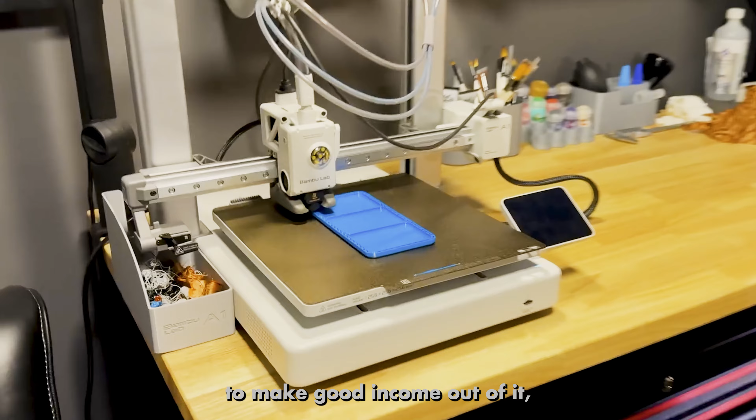Over the years of running my 3D printing company, I see the same mistake time and time again. People with a 3D printer are struggling to make good income out of it. Not because they are bad at 3D printing, and not because there is no money in 3D printing, but because they make some major mistakes. One of them is selling the wrong thing to the wrong audience.

That's why I will show you in this video how I make 3D printed LED signs step by step, the whole process. Let's get into it. See you in my office.

So we are here in Canva. When you want to make a 3D printed LED sign, at the beginning you need to make a logo, or the company will give you a logo. In case you make the logo yourself, you can start in Canva. I just made this simple text Anej Prints, and then we can move with this logo into Fusion 360.

But you need the file as SVG. You can export this file here. I think you need paid Canva for this file, but there are tricks we also teach our students that you can get away without paid Canva, because you can convert these files a different way to SVG. That's one way to do it right here.

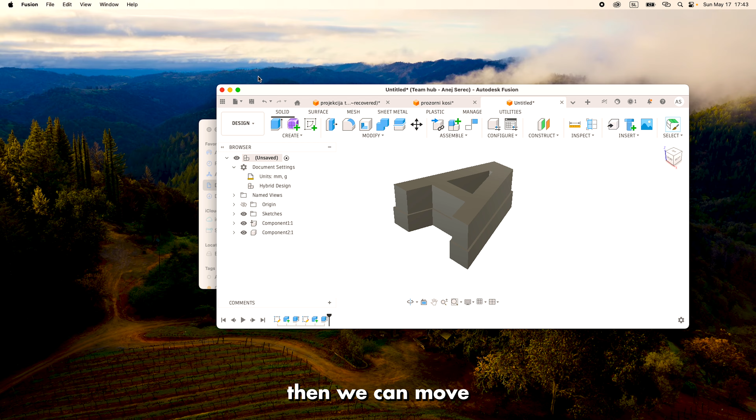That's it. So when you have the file, then we can move into Fusion 360. What I did here is I imported this logo. But before you import the logo into Fusion 360, you need to know how big a sign you will make, okay?

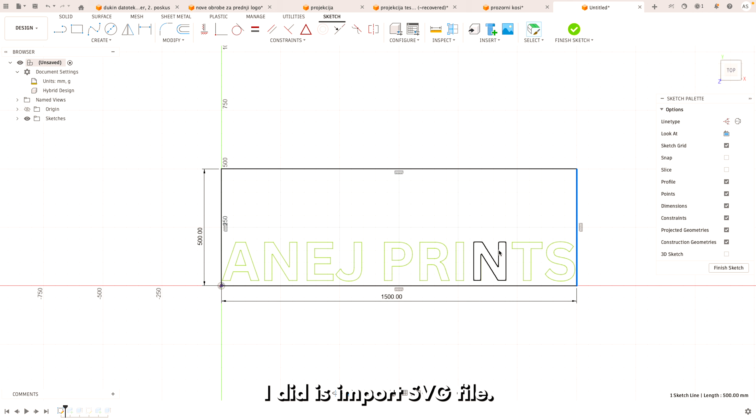So let's say I have the measurements here, 150 centimeters by 50 centimeters. This square was the first thing I did in Fusion. Then the second thing I did is import the SVG file Anej Prints and make it as big as the rectangle that I made before, okay?

Finish sketch. The next thing is I extruded the letter. You need to extrude one by one, and always when you extrude, you need to make a new component. It's not written here because we already extruded it, but you will see the new component here.

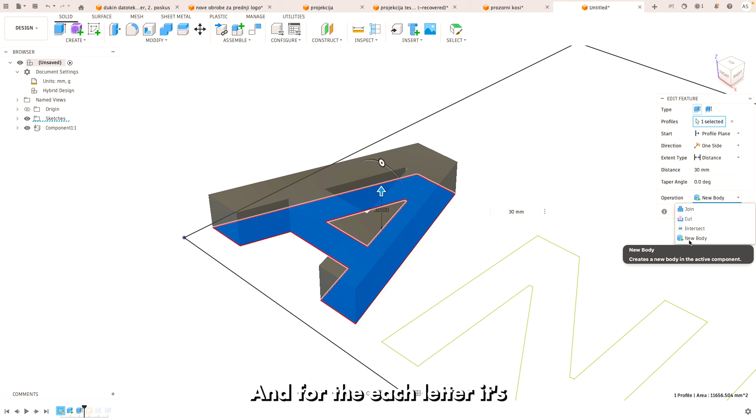For each letter, it's best to make a new component. You can also make new bodies, but making a new component is better. What we have here is the black part of the letter, and you don't need to make the hollow part.

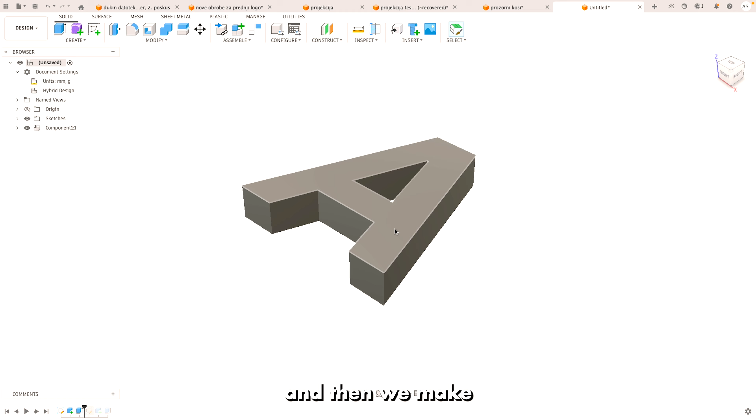You don't need to make the letter hollow, because I'm using a very good trick which saves us a lot of time in Fusion 360 3D modeling. We make solid parts here and then we make hollow letters in the slicer. So that's the black letter, let's say.

Then you need to make an offset. In this case, the offset is 2.5 millimeters. We teach our students which offsets to use, and it really depends on whether the sign is an indoor LED sign or outdoor LED sign, whether the letters are made in one piece or more pieces, and which material you're using—ASA, PETG, or PLA, okay?

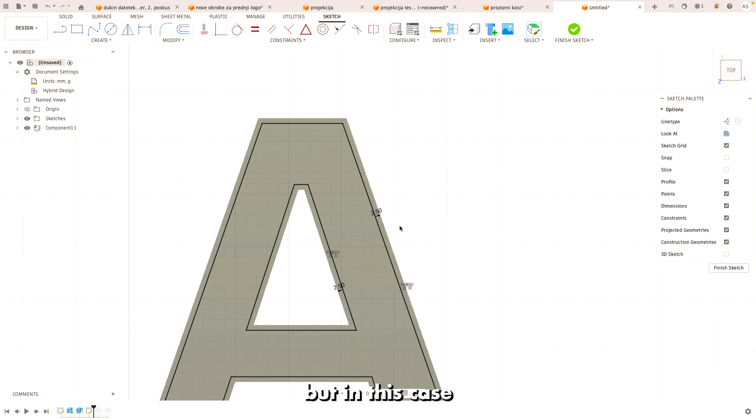So there are a lot of things you need to be careful with, but in this case we are making, let's say, an LED sign from PLA or ASA, so we can use this offset right here, 2.5.

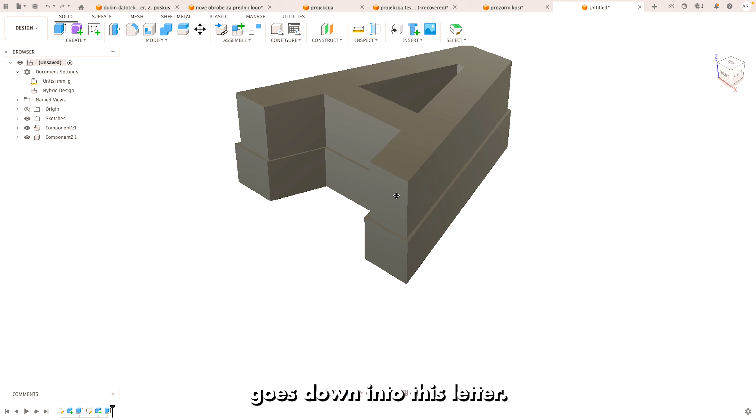Then I extruded this letter on top of another one, and this bigger part will be a transparent letter in the future, because you can see it can fit into this one like this, okay? And it's also higher. Why? Because this letter goes down into this letter, and then you need some space which will glow, because this will be the transparent part and the bottom part will be the black part, or any other color.

So then we export those two things one by one as STL files, and then here we are in the Bambu Lab slicer. When you import the letter, for example the black letter here, you always need to turn it 180 degrees.

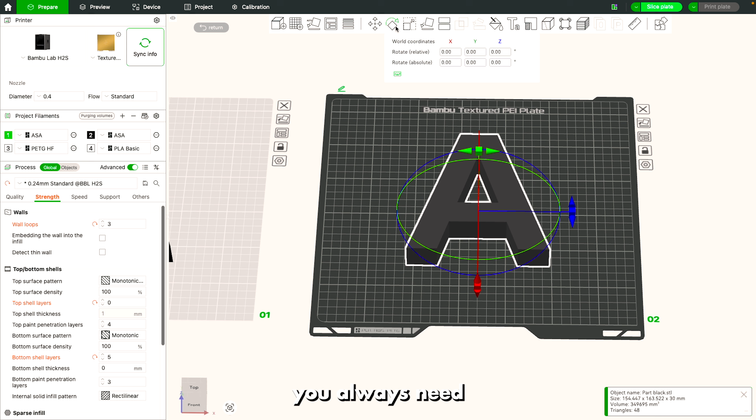Never forget this. Why? Because this side is actually the bottom side of the letter, and this side is actually the top side of the letter when it will be printed, because you want the top side to be on the bottom on the board, so it will have a nice finish, okay?

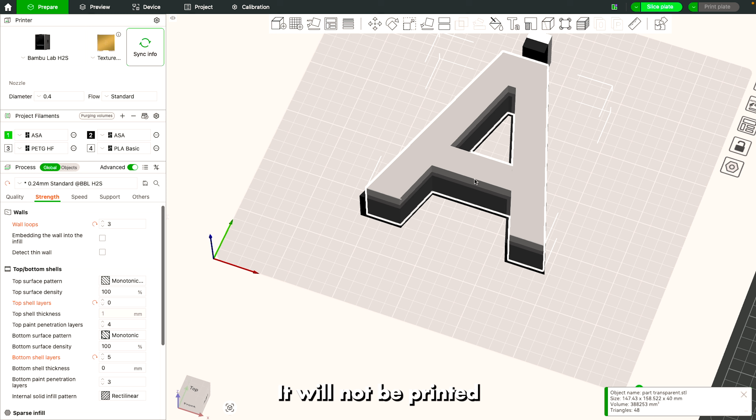And you don't need to turn around the transparent part. So we have the two letters here together. It will not be printed like this, of course. Both letters, transparent and black parts, will be printed separately on separate print beds, because it saves time so you don't need to change the filament every single layer.

If you would print them together, then you would need to do this. Okay, here's the trick. Everything stays the same here for this kind of LED sign.

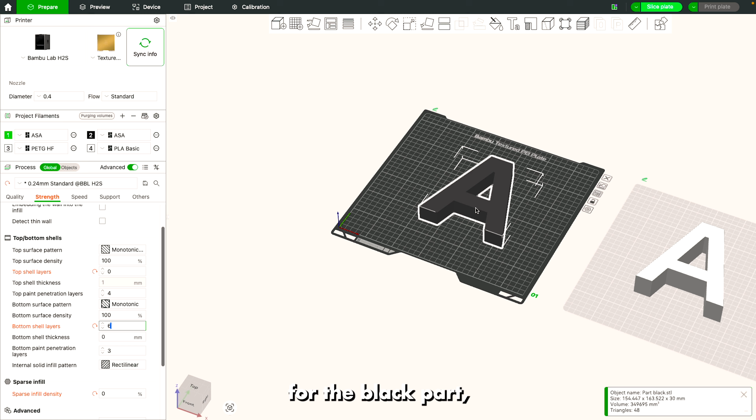Then the wall loops: you need 4 wall loops, 0 top layers, and let's say 6 bottom layers for the black part, and 0 infill. What we have then is a part like this when it's 3D printed. We have 4 walls and 6 bottom layers.

We saved a lot of time right now, you can already see, because we didn't need to model the hollow part in Fusion 360. We can just export a lot of letters as full bodies into the slicer, and when we slice each letter we already have the settings, and the letters will come out hollow.

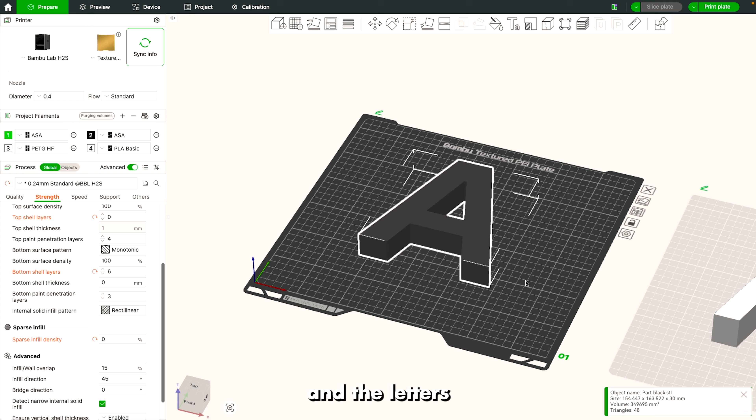For the transparent PETG letter, we can change the settings a little bit for inside LED signs. We can have just 3 walls and 5 bottom layers, and then it will look like this, and those 2 parts will come together nicely.

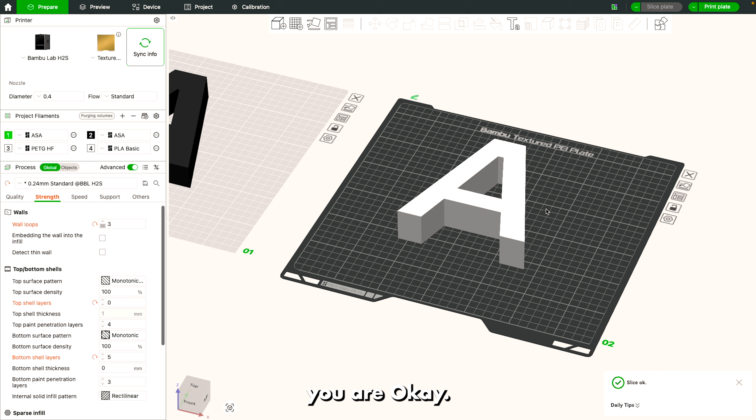You need to be careful about the fittings. The fittings are really important here, and they depend on whether you're making an inside or outside LED sign, and which material you're using. For inside LED signs, it's okay if it doesn't fit perfectly because it doesn't need to be watertight. But for outside LED signs, it's important that it's watertight so we can seal everything nicely with a sealant at the end. We can move to the workshop.

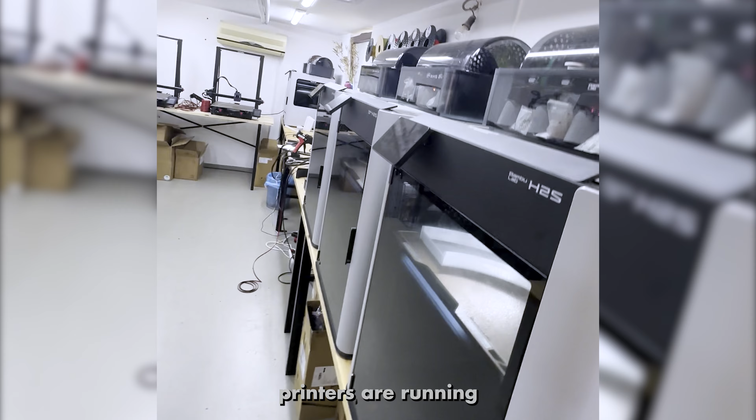So we are here in the workshop. Printers are running, and I want to show you how everything looks when it's 3D printed. Now I'm printing the transparent parts on our Bambu Labs. This is what we made in the slicer, this is what I was talking about.

So this is the black part, very nice surface. I always use PEI beds, and this is the transparent part, and they fit together very nicely. This is just a sample letter, otherwise we make bigger LED signs. I just made this to show you how it fits together.

When you have the black parts, like this letter which was made into 2 parts, you can put the LED light into it. We are using special LEDs called the S-type, and it can be bent very easily, and then you can just glue one cable onto it.

We still need to connect this one, and then the transparent part will come into this letter E. And then at the end it glows like this. It looks very beautiful.

So this is just the sample I made for you guys to show you how those letters glow. Looks like the letter is actually floating above the wall at the end, and clients like this. This is suitable for a lot of luxury applications.

We are also making outside LED signs like this for companies, different stores, and offices. Here we have the letters we are making right now. We have 6 LED signs in the manufacturing process right now. Those 2 are already finished, waiting for the client, and as you can see, the same process like I showed you. Those letters were painted.